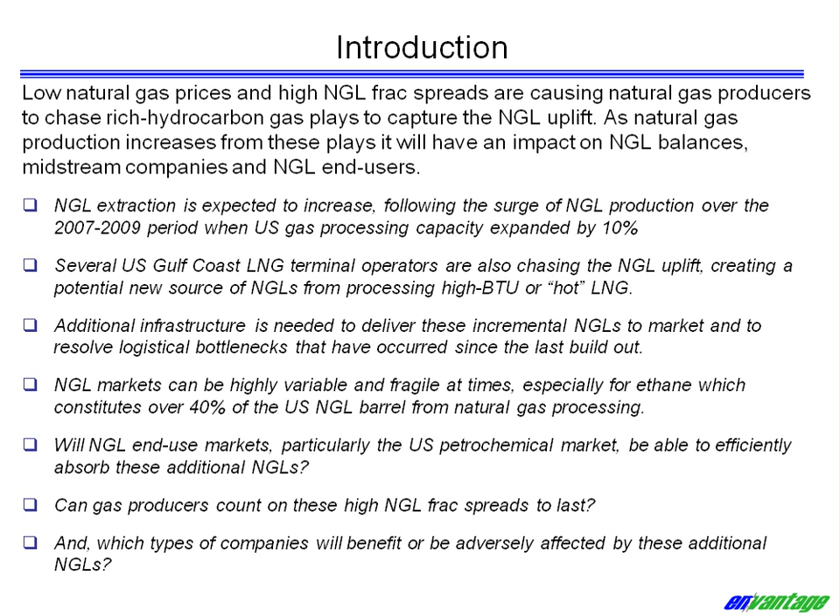When we look at the overview of the business, a couple of things to note about the basic facts of NGLs: natural gas liquids are not a single entity, but consist of 5 distinct components—ethane, propane, normal and isobutane, and natural gasoline. Each NGL has its own set of fundamental drivers and pricing mechanisms, even though NGL components may compete for the same market or come from the same supply source.

There are 2 major supply sources for NGLs: the processing of natural gas to extract a mix of NGLs that must then be fractionated into the individual NGL components, and as a byproduct of crude oil refining, the extraction or fractionation of those gas liquids from refinery off gases generated from various refining processes.

NGLs have little, if any, influence on their markets, and they must compete with alternative feedstocks or fuels. Consequently, each NGL must seek a market or be priced competitively to be fully absorbed by those markets. Any analysis of NGLs as a single entity would be a gross generalization of the fundamentals that drive supply, demand, and pricing of individual NGLs, and could result in misleading conclusions about the outlook of any individual NGL.

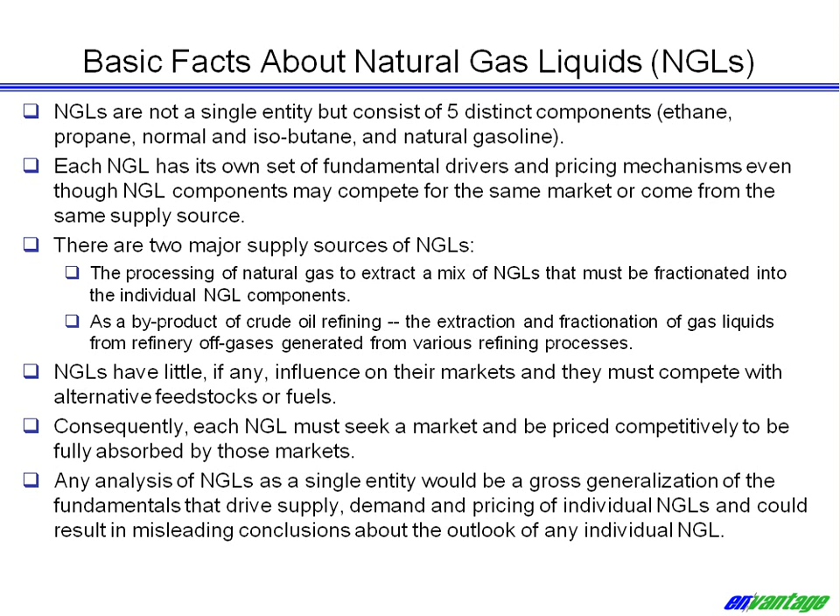So therefore, we really have to look at - I'll introduce some of the concepts for the NGLs as a whole, but we really have to break them apart and look at the individual NGL components. In this presentation, I'm really going to focus on ethane, and I'll explain why the focus will have to be on ethane going forward.

If we look at the major U.S. NGL supply sources and end uses, basically the U.S. NGL market - I just took a 5-year average going from say 2004 through 2009. The 5-year average is about 2.44 million barrels a day. So that's the size of our U.S. NGL market over the past 5 years.

Gas processing has actually contributed about 73% of the total NGL supplied to the market. And when you look at the amount of NGLs that have come from gas processing, almost 40% of those NGLs was ethane, about 29% was propane, about 17% was your butanes, and then natural gasoline was about 15% of that NGL barrel that came from gas processing.

As we noted before, crude oil refining is also a contributor of NGLs. A lot of it is on a seasonal basis, but the crude oil refining contributes about 16% of total U.S. NGL supplies, and most of that NGLs are propanes and mixed butanes that come off the refineries. There's a little bit of ethane that goes into the petrochemical industry.

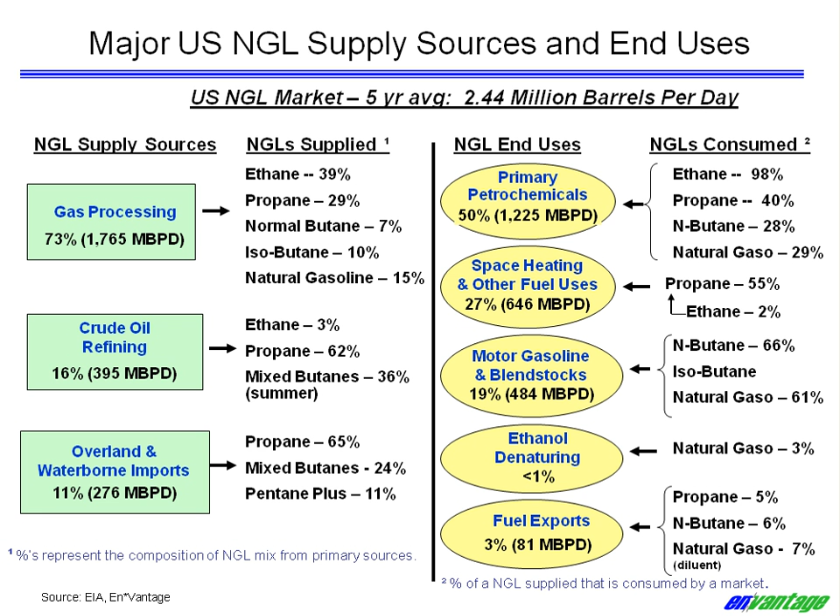So that kind of gives you a really broad overview of the basic supply sources of NGLs and the basic end use. But the key point here is that really gas processing is your major supply source, and your major end use is really your petrochemical manufacturing of ethylene and other olefins, and your major end use and health of the NGL industry is really tied to your primary petrochemical market.

If we try to tabulate and track every major driver for liquids, both on the supply side and the demand side, it would look something like this. I'm not going to go over this slide in a whole lot of detail, but on the supply side, certainly the biggest drivers for the production of liquids from gas processing are associated gas production, that is gas that's associated with oil production, and gas that's non-associated with oil production. There's a certain quality of NGLs in those gas streams. If the gas is rich enough, it has to be processed to meet pipeline quality specs, and that feeds into the NGL supply. Also, you've got refining operations, and everything else that can influence imports and so forth.

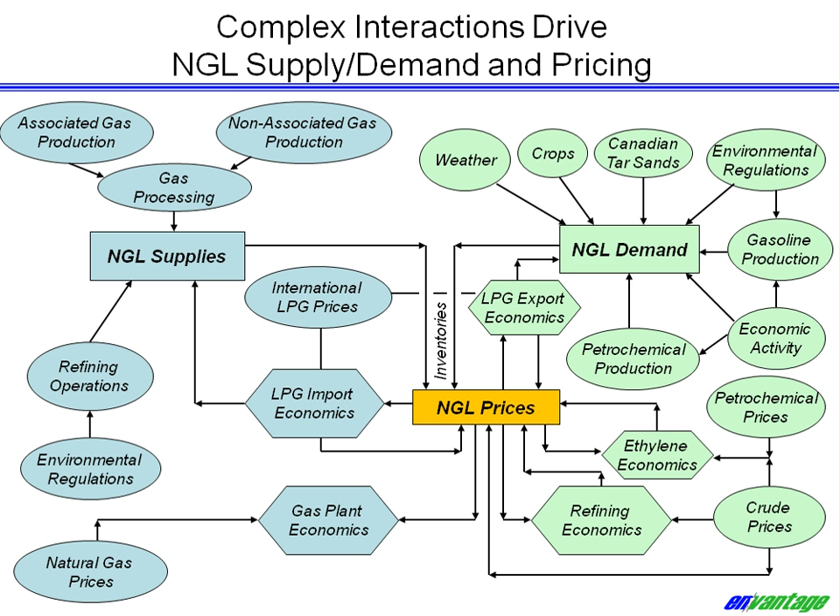Environmental regulations can have a big impact on refining operations and its ability to either produce liquids or in some cases consume liquids on the demand side. On the demand side, there's a whole host of fundamental drivers, everything from weather, environmental regulations, how much gasoline we produce, the economic activity that may drive petrochemical production, things that determine ethylene economics and refining economics all play a role. It's a pretty complex thing you've got to watch all the time. The problem is not all NGLs are influenced by all these factors. Some are influenced by some of these factors, and that's why you have to break up the NGL barrel to really understand which factors influence which NGL.

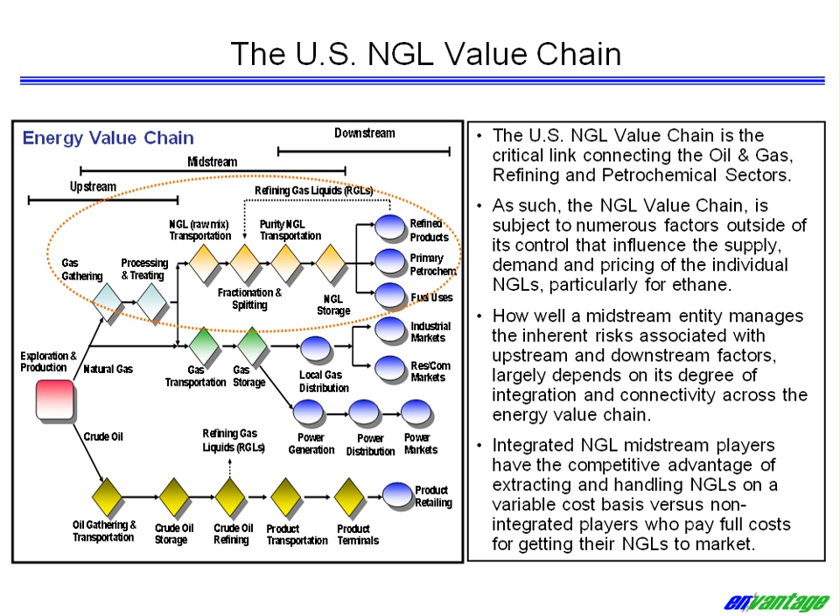If we move on to the next slide, the one thing I want to point out is where the NGL value chain fits in the total energy value chain, and it's really between exploration, production, and end uses. The key thing here, too, is when you look at different companies in the midstream sector, you want to see how integrated they are along this value chain. Usually the integrated midstream players have the competitive advantage of extracting and handling NGLs on a variable cost basis versus the non-integrated players who pay full cost for getting their NGLs to market.

One thing to note, too, is the basic drivers for NGL extraction, whether from gas being processed in a natural gas processing plant or from crude oil—ethane is really the only discretionary component in most cases. That is, you have some discretion to leave the ethane in the natural gas stream or take it out. The heavier NGLs, such as propane, normal butane, isobutane, and natural gasoline, all have to be taken out of the natural gas stream to meet BTU specifications or dew point temperatures required by the pipeline. In crude oil refining, it's basically just a byproduct.

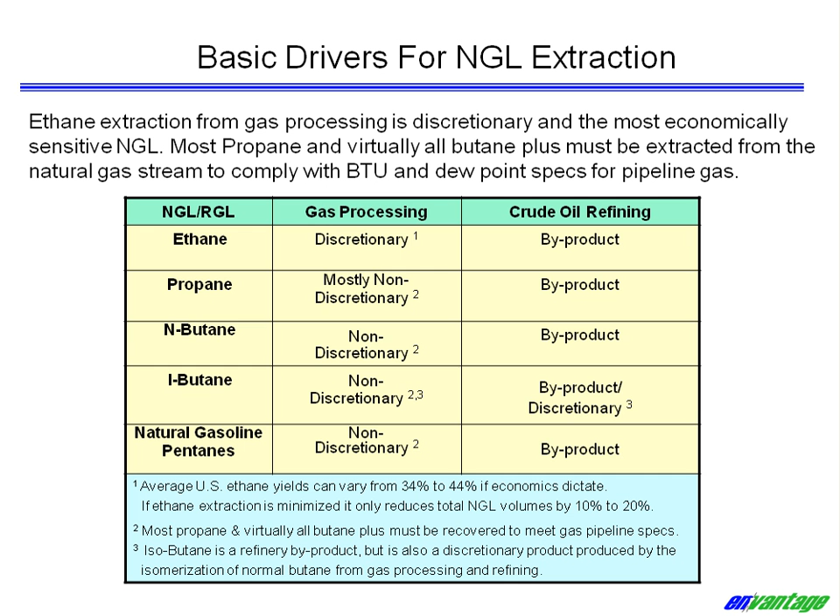Because of the different processes in the refinery, they produce off gases. Those off gases contain NGLs, and then they make a decision whether to extract those NGLs or burn that off gas as fuel. Usually they can't burn it as fuel because there are other impurities in that off gas that create greenhouse gases, so they usually have to extract it and just sell it to whatever the market will bear. So it's basically a byproduct of refining operations, and to some extent you have to take out a lot of the NGLs out of the gas stream to meet pipeline specs, with the exception of ethane.

If we just look at a pattern of supply and demand, this layers on the different primary supply sources for liquids, and you can see there's a very seasonal pattern for the supply of liquids. Usually supplies peak during the summertime when refiners have to take out a lot of the NGLs from their gas liquids, and demand is denoted by the red dotted line. It actually peaks when supply is at a seasonal minimum, so storage is used to balance supply and demand going forward. But as you can see here, the supply of NGLs has been fairly variable over time.

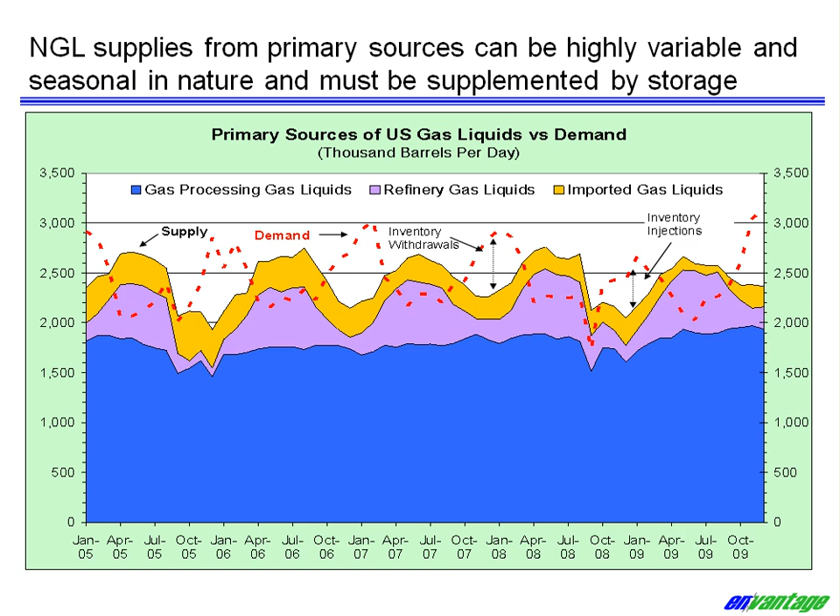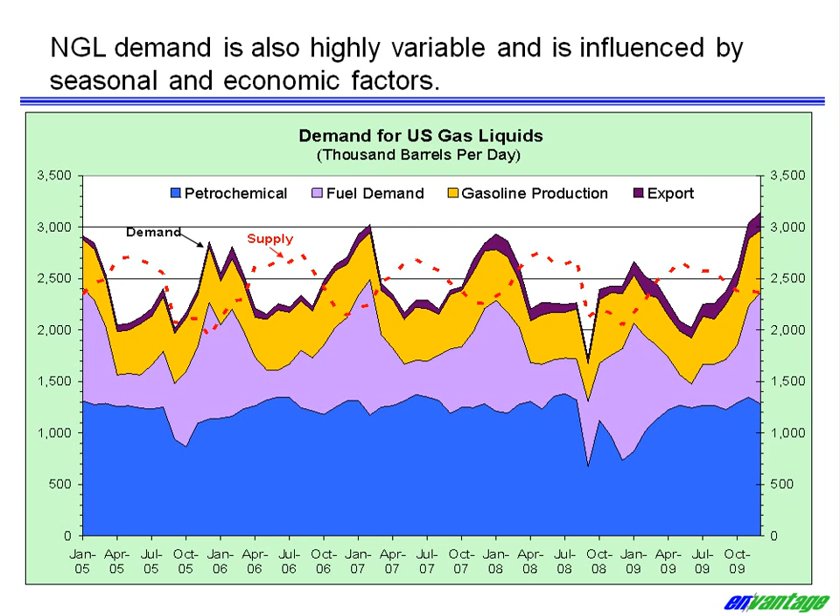Again, supply is counter-seasonal to demand, and this is where inventories come in and out of storage to balance supply and demand. So it's a highly variable type of situation from a standpoint of demand and supply. It's not a steady state. It's highly seasonal in some cases.

The other thing I want to key off this: each NGL has different markets, with the exception of ethane. Ethane's primary market is in the production of ethylene, and so it has to compete with different feedstocks. Some of them are NGLs themselves. Some of them come directly from the refinery, like naphtha and gas oil. If ethane is not priced competitively with these other feedstocks, then it has to stay in the natural gas stream, or a significant part of it has to stay in the gas stream.

And there's a relationship between ethane and crude oil, and it can vary all over the map, but right now ethane is selling at a very low relationship to crude oil. It's been trending down over time, and you'll see that most NGLs have been trending down relative to crude oil.

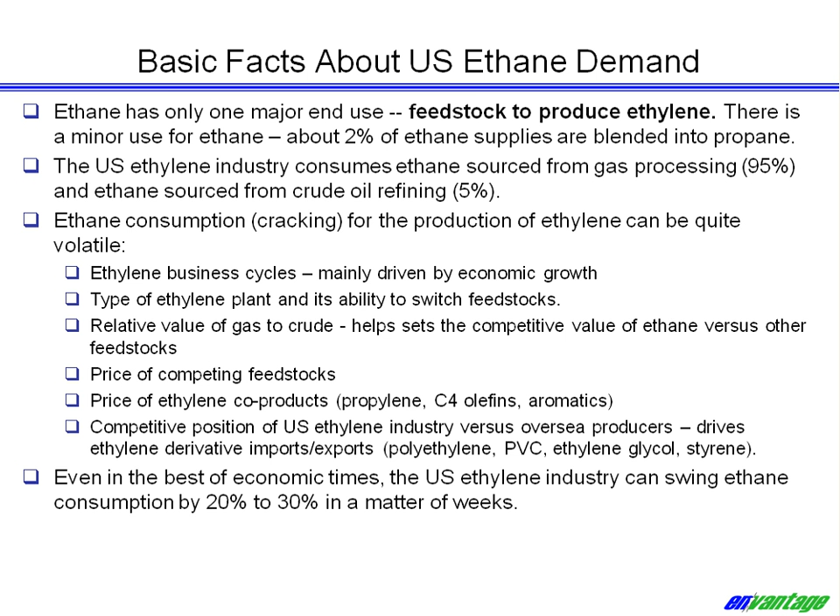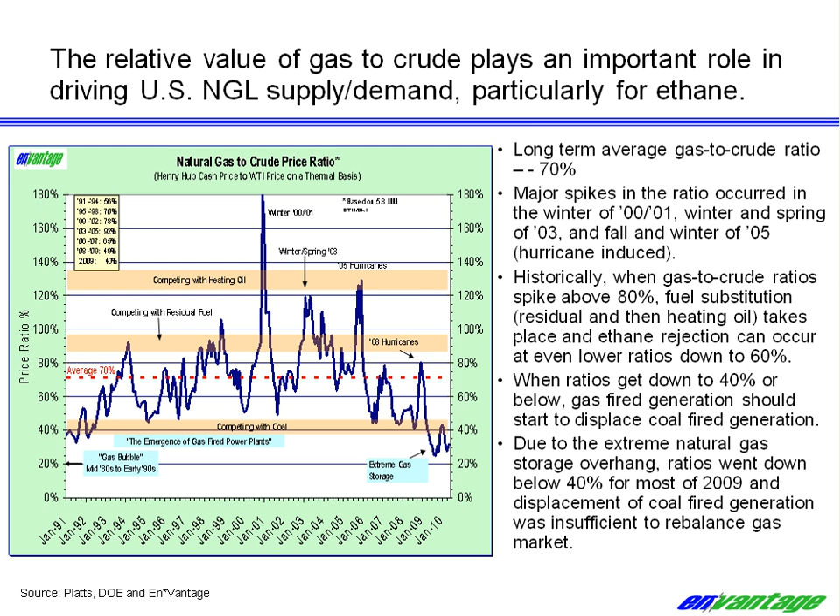The other thing is that what's giving us the large NGL uplift is that we have low gas-to-crude ratios, and we've had relatively high crude prices compared to the past. So the BTU spread between natural gas and crude oil has been quite high. Low gas-to-crude ratios plus high crude prices has created a very wide gas-to-crude spread of around $10 a million BTUs.

This is a huge amount, as you can see over time. That average value has been right around $2 a million BTUs, and we've been trading somewhere between 8 and even as high as $12 a million BTUs, and this is what's giving us our NGL uplift.

This is actually shown in the next chart. Because NGLs sell at a relative value against crude oil, and the basic price floor for NGLs is natural gas, we get this really wide NGL uplift.

What we've done here is taken a typical NGL barrel from a new processing plant, which extracts at least 50% of its NGL as ethane, and you can see the very wide margins that we have seen.

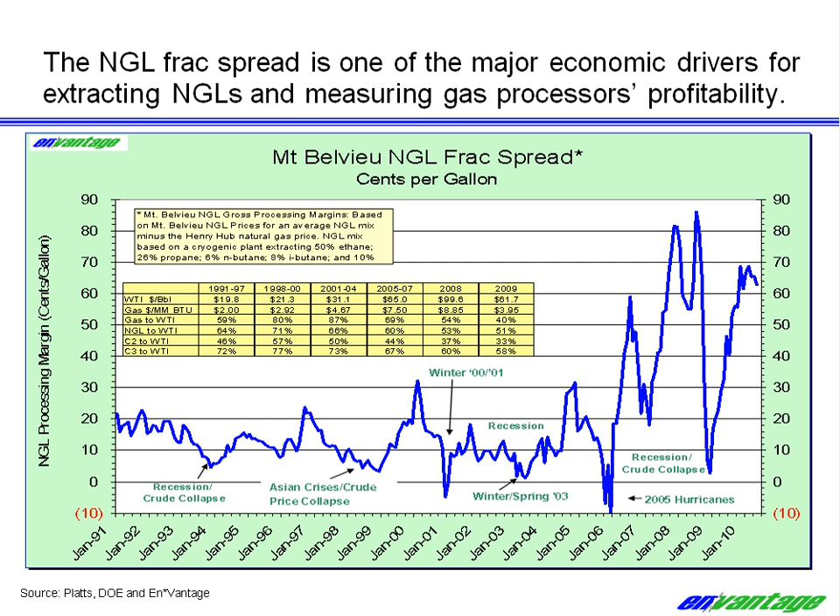This is why a lot of producers want to go after the rich gas plays, because if they do, they get an uplift to the value of their natural gas by extracting the much higher valued liquids in that gas stream. So we've had a very high NGL uplift over the last couple of years due to the very low gas-to-crude ratios.

Basically, as more ethane is brought to market, its value relative to crude goes down. Also, the petrochemical industry has quite a bit more flexibility than it's had in the past to swing off and on ethane. So if ethane gets too pricey, petrochemicals swing off and that brings the value down. The combination of more ethane supplies and the flexibility of the ethylene industry has pushed ethane's price down relative to crude.

One thing to note, as a bit of a side note, is that when you see ethane extraction numbers from the government, the EIA, they're really tabulated at the tailgate of a processing plant.

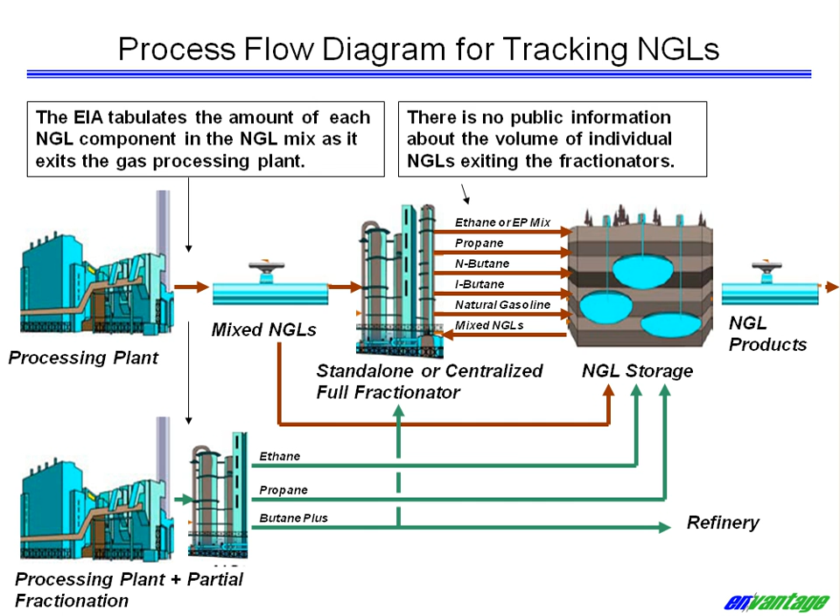There is no public information about the volume of individual NGLs exiting the fractionators. All that information resides at the tailgate of the plant. In some cases, the processing plant will have fractionation associated with it, or partial fractionation. But in most cases, what you see is a processing plant, like it may be up in the Rockies, and it sends its liquids down very long NGL pipelines that may be owned by Enterprise Products or ONEOK or whoever, and then it goes to a centralized fractionator.

If we had to broadly draw on a map where the flow of NGLs is, what you have is most of your processing industry located in processing regions where the gas production is. So you have major processing regions like the Rocky Mountain area, the San Juan Basin, or the Permian Basin in eastern New Mexico and West Texas. South Texas is a major processing region. All along the Gulf Coast, especially the Louisiana Gulf Coast, which takes a lot of offshore gas, that's another processing region. Then you have your mid-continent region, with the Anadarko Basin being another big processing region. And also there's a big processing region in western Canada.

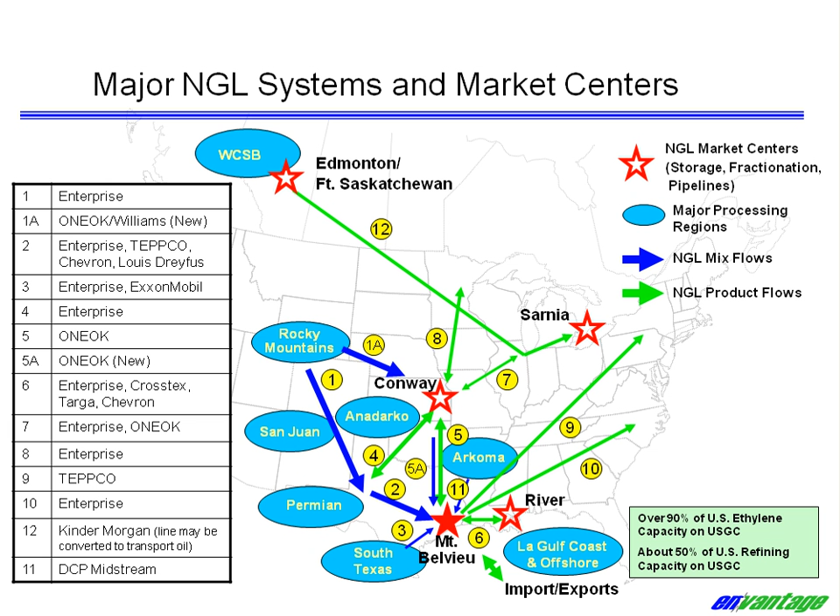So that basically gives you a picture of the major flow patterns for NGLs, and also who owns those big NGL corridors or pipelines to the marketplace.

One of the things too is that when we've referenced NGL frac spreads on the Gulf Coast, we've done so by taking Mount Belvieu prices less Henry Hub prices for natural gas. But in actuality, you've got to subtract transportation and fractionation costs to come up with what the regional NGL netback value is at the plant. That is, you take your Mount Belvieu price for your individual NGL, and you figure it costs so much to transport this NGL to Mount Belvieu, and so much to fractionate, and that's how you come up with your regional NGL netback value. Then you take the value of natural gas at the point where the processing plant is located, and that gives you your shrinkage value, or the cost of taking the NGLs out of the natural gas stream, and that's how you come up with your regional NGL frac spread.

So realize that the NGL frac spreads I've been quoting are based on a Mount Belvieu basis, but to net it back into a particular region, you have to subtract out transportation and fractionation costs, and also take into account the value of natural gas at that particular site.

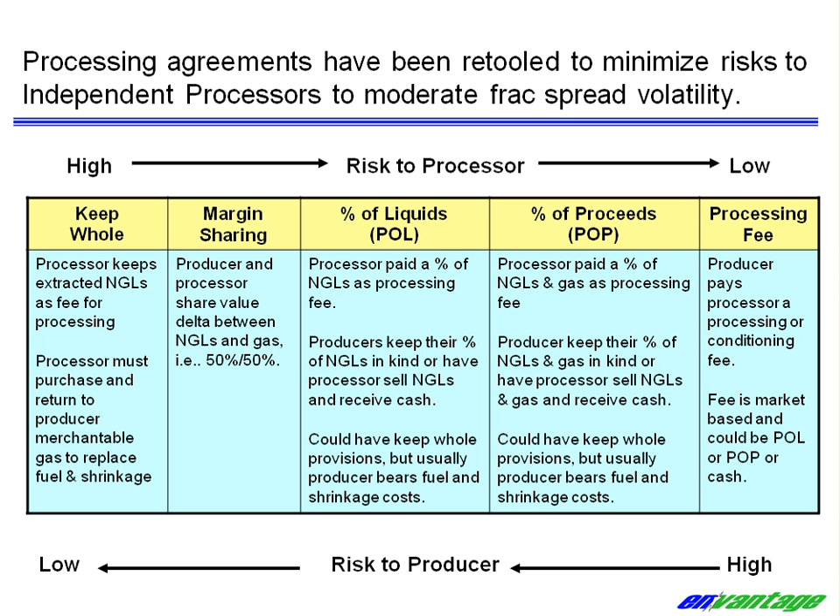In some cases, there are processing fees built into these processing contracts. That is, if the value of liquids gets so low relative to the value of natural gas, the processor can charge the producer a fee for basically conditioning his gas. So you have to be aware of different types of processing contracts that are out there in the marketplace.

The other thing to realize when you look at different companies that operate along the NGL value chain is that the gathering and processing of gas can really float. There could be a lot of commodity price risk depending upon the type of gathering or processing contracts they have. That is, if they're on a percent of proceeds basis, then they're really floating with the commodity price.

But as you get downstream from the processing plant into NGL transportation, fractionation, or NGL storage, it's really a fee-based type of revenue stream. There's very little commodity price risk involved, though indirectly there is, because if it becomes uneconomical for a processor to extract ethane, then those that own the transport, fractionation, or storage are subject to volume risk. And there's certainly counterparty risk in that.

So a lot of people think that downstream, in the NGL transportation, fractionation, and storage part of the value chain, there's very little risk, but there is quite a bit of risk - volume risk - especially if there's gas decline behind the processing plant, or it becomes uneconomical to extract the ethane. You could see maybe 50% or more of your NGL volume go down, so those that own that part of the value chain have quite a bit of risk.

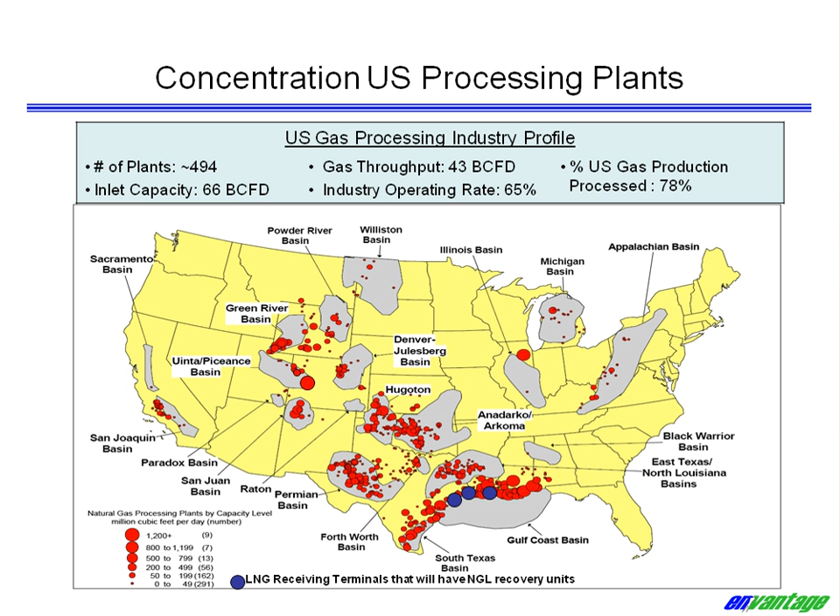So that's a new form of receiving NGLs via rich or hot LNG.

If we look at what's been going on, we've had major reserve additions in the big shale basins. We're getting big reserve additions in the Texas inland areas like the Barnett Shale. We've got Wyoming—it's not such a shale play, but we're finding more reserves of natural gas there—and in Colorado, and certainly in Oklahoma, like the Woodford Shales.

What's not shown here is probably the Marcellus in the Appalachian area. It is shown here, but it's going to grow much more than what's shown. The government hasn't updated its data since 2008. Also, South Texas is really going to be a growth area because of the Eagle Ford Shale.

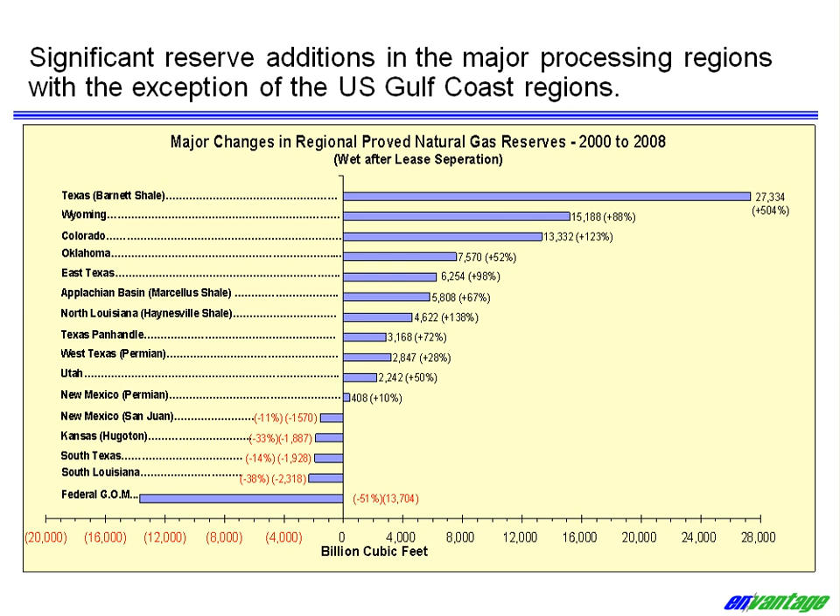Because of all these big reserve additions, we've seen a lot of drilling that has occurred. This chart shows that we've had a big surge in gas production since 2006. We also overlaid rig count, read on the right-hand axis, and we saw rig count really surge as these new gas plays got developed.

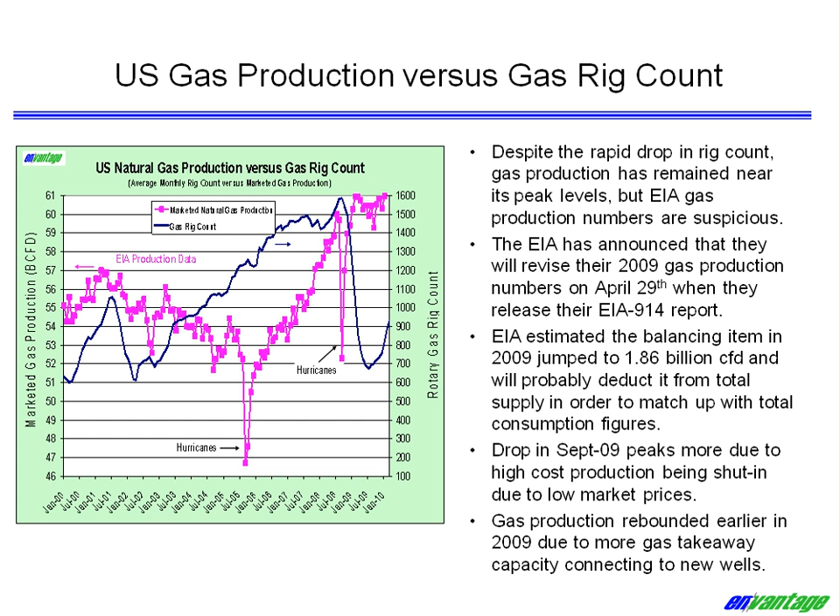Right now we're producing somewhere between about 59 and 60 BCF a day of gas production. Even though drilling has come down quite dramatically, we're still seeing fairly good gas production. We might see a little bit of a decline, but not much. It takes about 1,000 gas rigs in general to keep gas production from declining. We're right around 950 gas rigs, so we're basically holding our own, and that's expected to continue, maybe a slight decline over time, but nothing major.

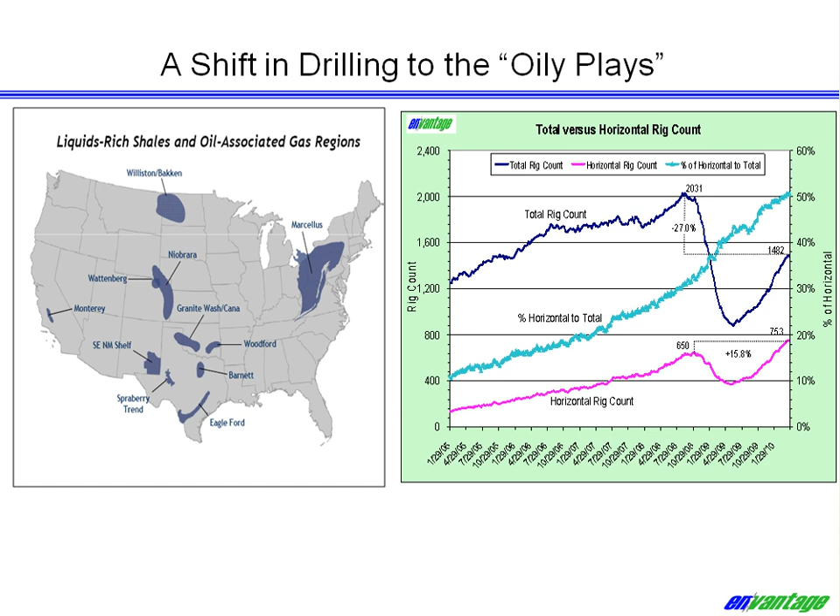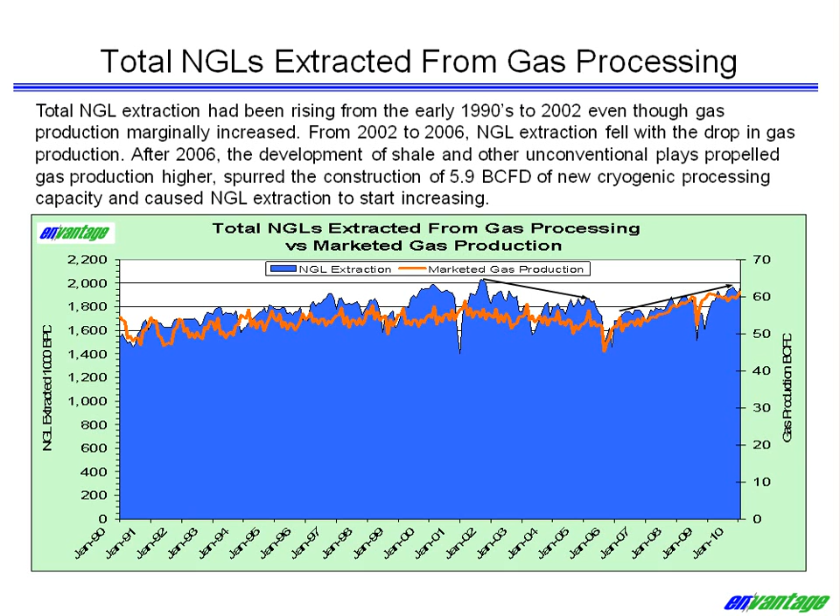If we look at total NGL production over time, overlaid with natural gas production, you can see that from the early 2000s to 2006, our NGL production was trending down. Then as all this new gas started to be developed, we added a lot more processing plants—about 5.9 BCF a day of new processing capacity, basically expanding the processing industry by about 10%. We saw that NGL production started to really pick up from 2006 to the present.

One is that we added a lot of new cryogenic-type processing plants that have deep ethane extraction capability. The majority of processing plants in the industry for the past 20 or 30 years have been cryogenic, but they've only been able to get maybe anywhere between 50 to 70% of the ethane out of the gas stream. Now these newer cryogenic plants are able to get as much as 90% of the ethane out of the gas stream. So that's one reason why we've seen ethane extraction pick up.

The other reason we're seeing the heavier components not increase in total volume is that the gas is actually getting a little bit leaner. That is, there's less liquids in the gas stream, and there's still ethane contained in that gas, and we're doing a great job extracting it, but we're basically extracting all the propane, the butanes, and natural gasolines that we can.

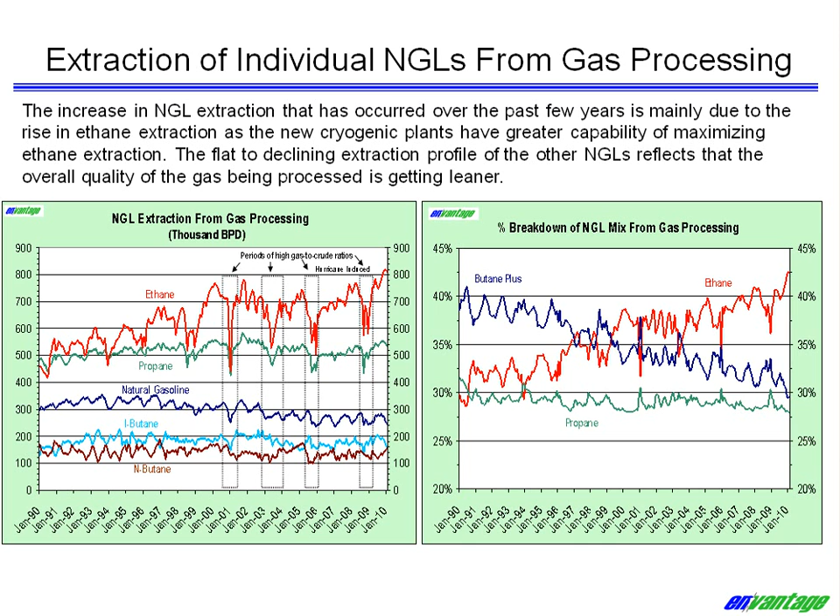And that's why we really try to focus on ethane, because of its usage - it can be kept in the gas stream, or not - and also because of its usage in the petrochemical industry, they can use it or not to a great extent. So you really want to focus on that part of the NGL barrel because it has the most economic sensitivity of all the NGLs.

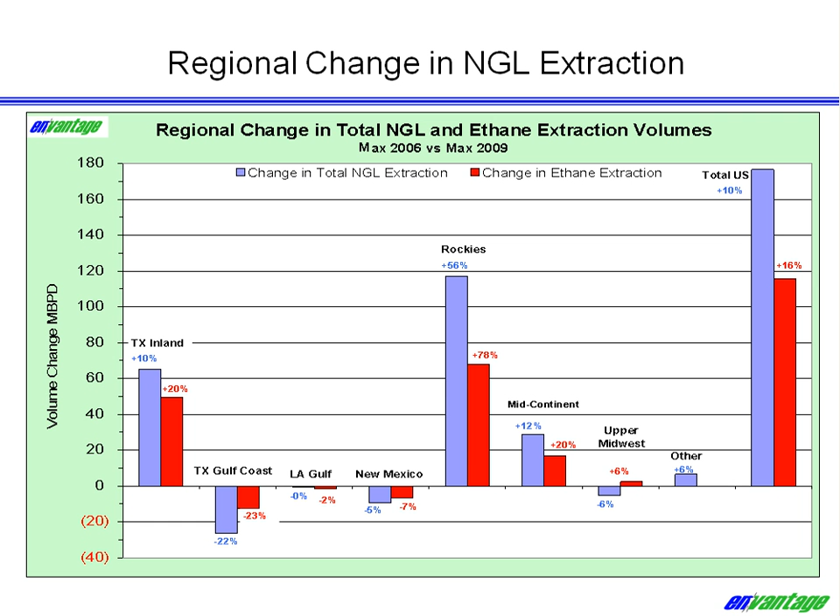So we're seeing a regional shift in NGL extraction, and that's caused us to build more infrastructure to bring those liquids down to the market centers. That's why you've seen a lot of activity by Enterprise and ONEOK in building new pipelines, new fractionators, and so forth, because they're trying to adjust to this regional shift in NGL extraction.

Over the next 2 years, even though we've built a lot of new plants, we see another 1.3 BCF of new processing capacity being built, with the capability of putting another 100,000 barrels a day of NGLs onto the market, of which 44,000 barrels a day will be ethane. Now, this is if they were operating at 100%. In our forecast, we put some variables to this to say these plants aren't going to operate at 100% - they're going to wedge up over time. But anyway, that's what they're capable of doing if operating at 100%.

The Eagle Ford Shale in South Texas has the potential to be a major NGL producer from the rich gas plays in those shales. That gas is extremely rich - it has about 9 gallons per 1,000 cubic feet of gas. Some of those liquids have to be taken out right at the field before they even reach the processing plant. But we think the amount of gas that could be produced there is about 3 to 3.5 billion cubic feet a day, and about two-thirds of that gas will be rich, we think.

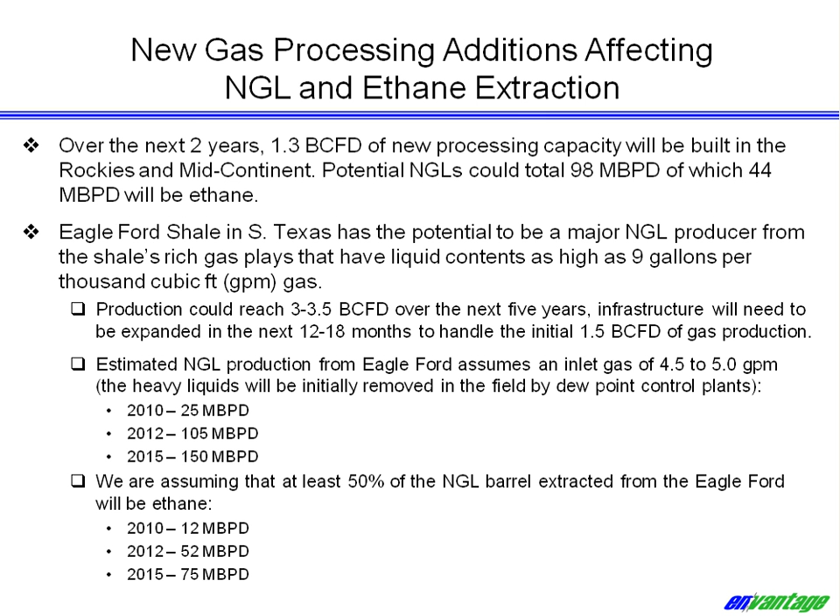Over the next 12 to 18 months, more infrastructure is going to be needed to handle the first initial surge of this gas stream, which we are predicting to be about 1.5 BCF a day over that period. The estimated liquids from the Eagle Ford Shale - we're assuming about 4.5 to 5 gallons per 1,000 cubic feet will be in this gas stream when it reaches the plants. And we could see by 2015, 150,000 barrels a day of more NGLs, of which about 75,000 barrels a day will be ethane.

We're also thinking that LNG terminals could be a major source of NGLs over time, but basically the rateability is very, very questionable from these LNG terminals. We've got about 1 BCF a day of NGL recovery from these terminals, at the Trunkline terminal. The uplift is about $1.50 today, so there's a lot of incentive to try to take these liquids. A lot of these liquids - primarily about two-thirds - is ethane that's contained in this LNG stream.

By 2012, Freeport LNG is expected to have about 800 - they're going to start out with 2 trains of 400 million a day each of processing capability, and then later on, Cheniere is going to add about a B.

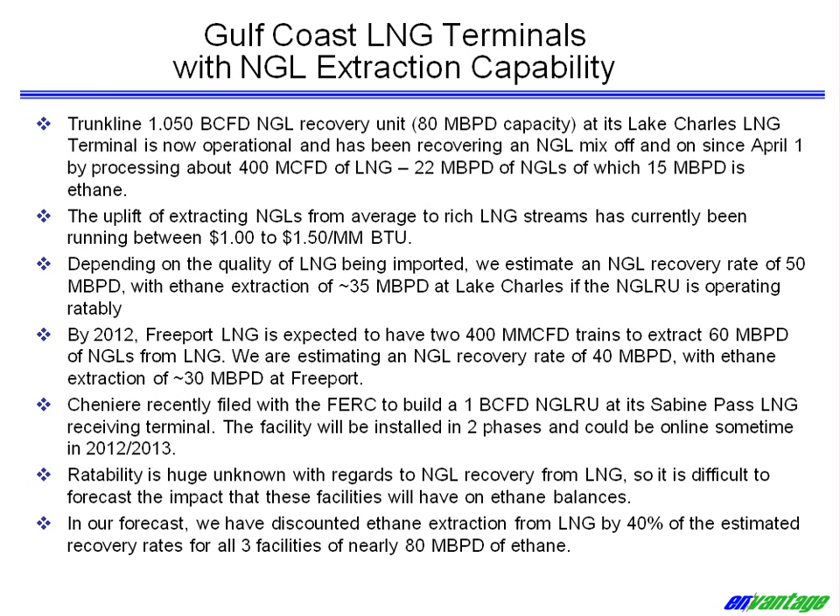Rateability is a very big question mark here. We don't know how often they're going to bring LNG in to extract, so there's a big question mark in terms of whether we're going to see the full potential from these terminals as they are designed to do.

If we look at this from a total amount of liquids, there's one chart devoted to total liquid extraction, and one chart devoted just to breaking out the ethane portion. As we can see, the plants that existed before 2007 are noted in the blue shaded part of the bar chart.

Those plants will continue to see decline in liquid extraction from their legacy gas, but over time, as new plants recently built over the last 2 or 3 years, and those that have been announced to be built, shaded in green, come online, and you add on what could come from the Eagle Ford Shale and what possibly could come from LNG, we could see, in the case of ethane extraction, it should really start to ramp up and hit well over 900,000 barrels a day. About over 2 million barrels a day is going to come from total NGLs. We have built in decline rates into this, but we're going to get a lot more liquids, principally ethane, onto the market in the next 2 to 5 years.

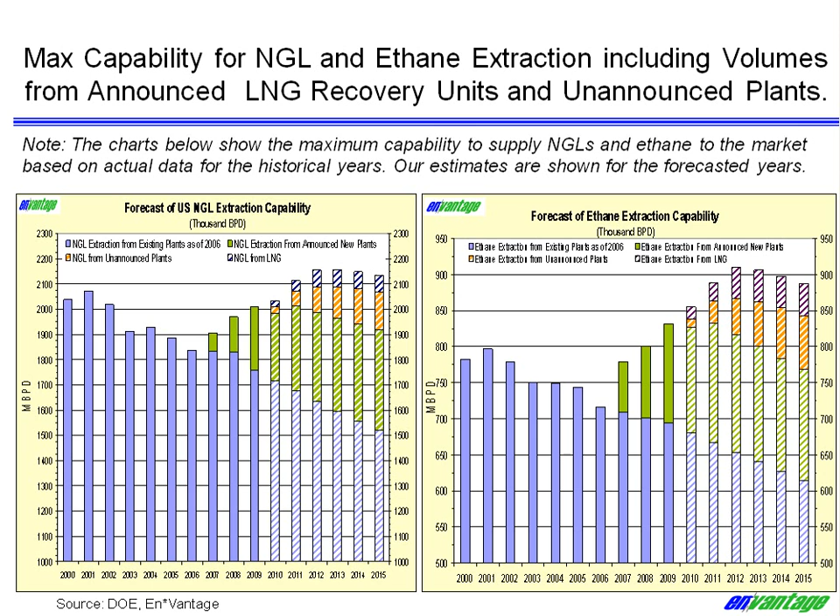Another wild card is how much we're going to get from the Marcellus Shale. There's about 1.2 BCF a day in new processing capacity that's been announced to be built. Right now we're estimating about 57,000 barrels a day will be propane plus that will be extracted from these plants. At this time, no ethane will be recovered. However, initially they could recover 42,000 barrels a day of ethane if they had a market.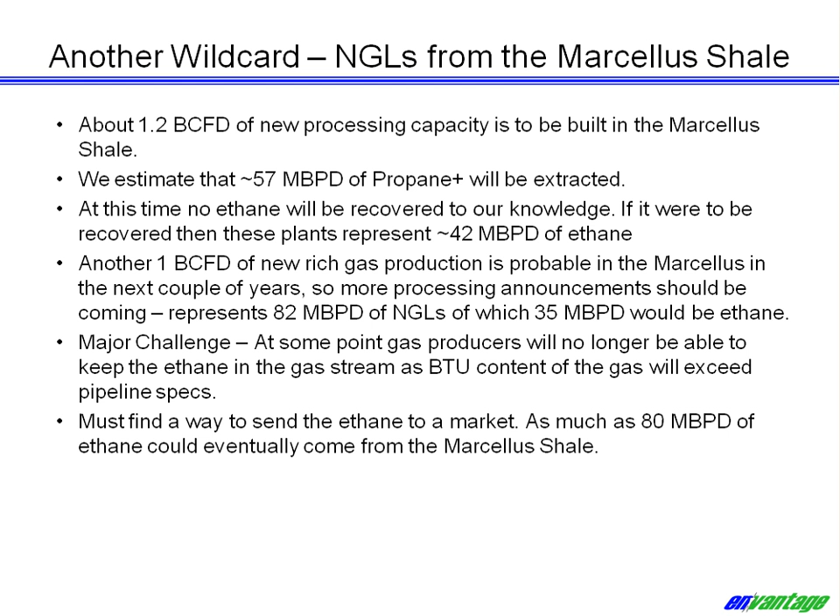But right now they're going to be blending that ethane into the gas stream. Another BCF a day of new rich gas production is probable in the Marcellus play, representing about 82,000 barrels a day of liquids, of which about 35,000 barrels a day could be ethane. The major challenge is that at some point the gas producer will no longer be able to keep the ethane in the gas stream, as the BTU content will exceed pipeline specs in the Northeast, so they must find a way to extract that ethane. We think as much as 80,000 barrels a day of ethane could eventually come from the Marcellus play.

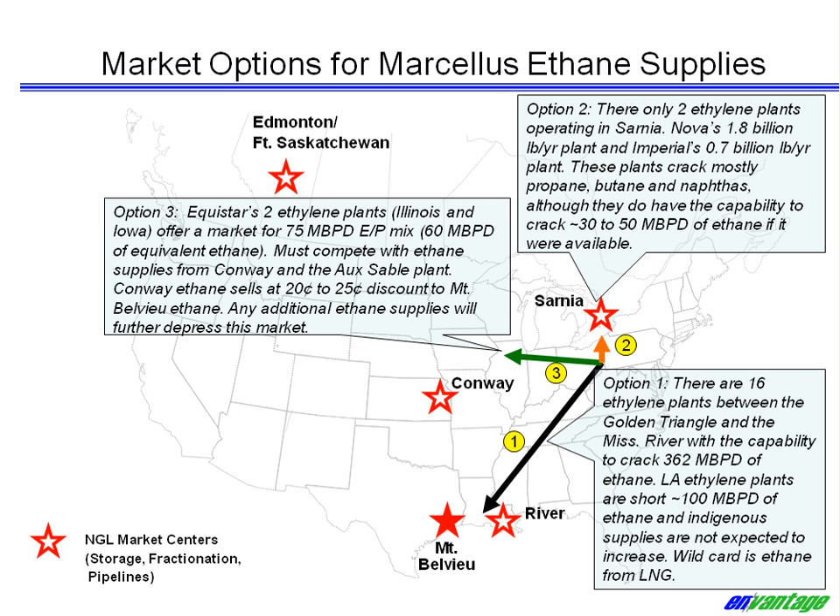Some projects have been announced - one going into Sarnia, and several announced to go in the Midwest. We think the best option for these liquids is to come to the Gulf Coast - that's where the biggest market is, specifically for ethane. We think going into Sarnia and the Mid-Continent is a real mistake by some of the folks who proposed these projects. We think they'll get very low netbacks for the producers, and those markets are not large enough to absorb the amount of ethane that could come out of the Marcellus play.

Let me just quickly go over the NGL demand by the petrochemical industry.

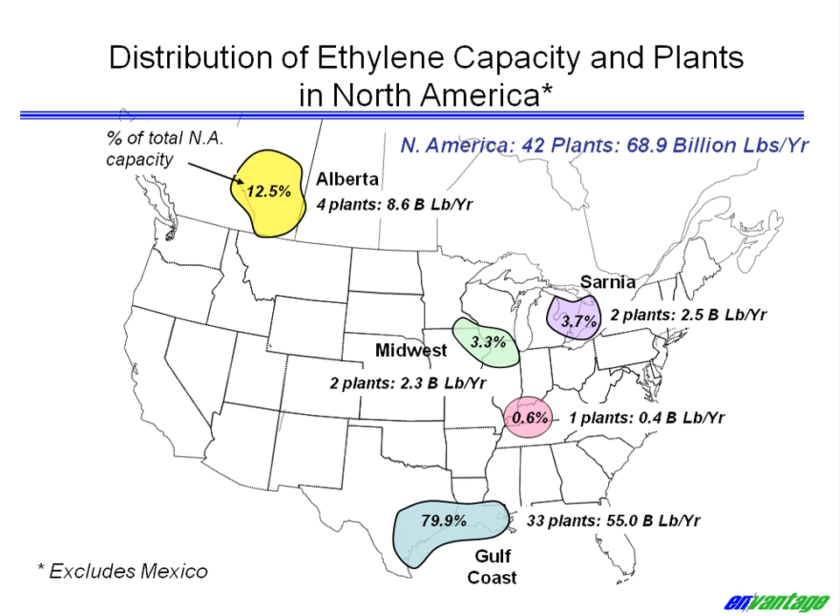The next slide, titled Distribution of Ethylene Capacity and Plants, shows the distribution of ethylene plants across North America. Nearly 80% of U.S. ethylene capacity is located on the Gulf Coast between Corpus Christi, Texas, and New Orleans, Louisiana. The next highest concentration of ethylene plants is in Alberta, then a small amount in Sarnia, a small amount in the Midwest, and one plant in Kentucky. That gives you a broad overview of what the footprint of the North American ethylene industry looks like. This is just the listing of all the plants in North America.

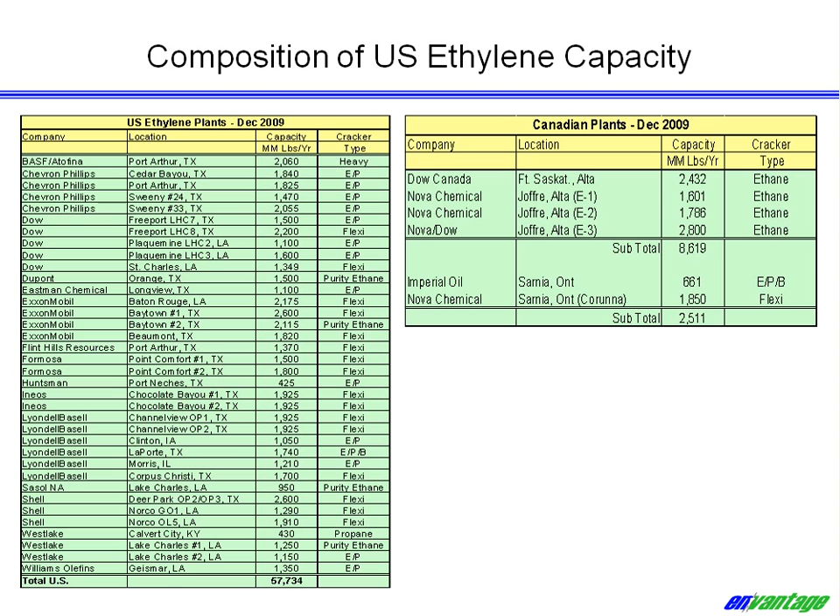Not going to go over that, but in Canada they mostly crack ethane up there, while in the U.S. they crack a variety of feedstocks - not just ethane, but a whole range - and there are different plants that can crack different types of feedstocks. If we go on to the composition of U.S. ethylene capacity, this is what it looks like. Over time, the U.S. ethylene industry started getting away from cracking the lighter feedstocks in the mid-2000s because they thought gas was going to be very, very tight.

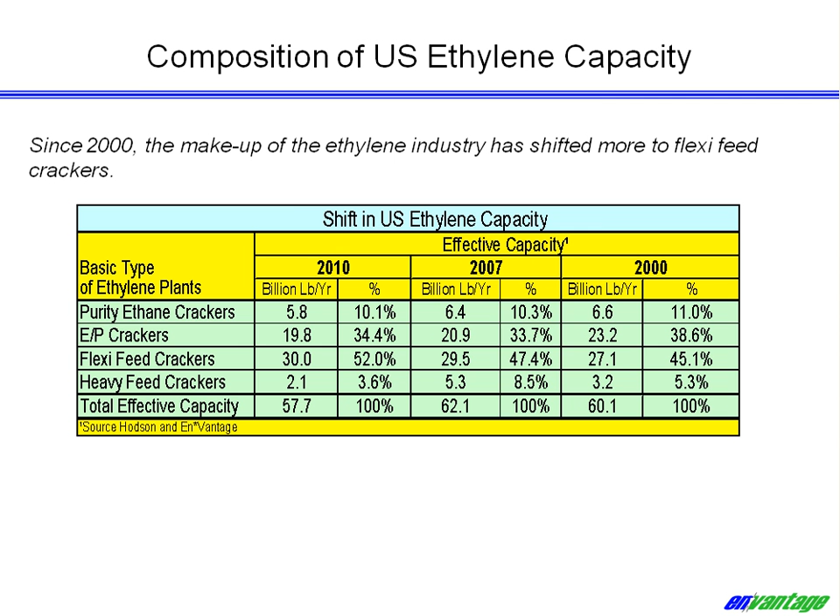What happened is last year, and in 2009, when gas ratios came in very low relative to crude, producers started to shift more of their cracking towards lighter feedstocks, shifting a lot of their flexi-crackers over to crack more ethane. So the ethylene industry has not been a really good judge of the natural gas picture over the last 20 or 30 years. They've usually leaned one way when they should have leaned the other, guessing the gas picture wrong several times.

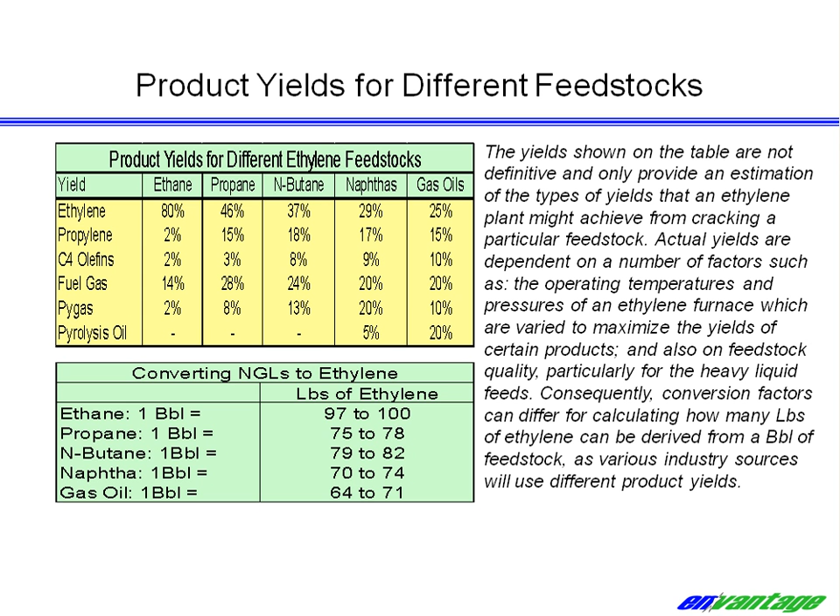I'm going to skip this next slide, but basically it says that if you crack ethane in an ethylene plant, 80% of it goes into ethylene. The heavier the feedstocks, the less ethylene you get, but the more co-products you get. The profile of the U.S. ethylene industry is like this, but anyway, we're cracking a whole lot more ethane, at the detriment of cracking the heavier feedstocks. I'll leave it at that, and then we can go to client questions.

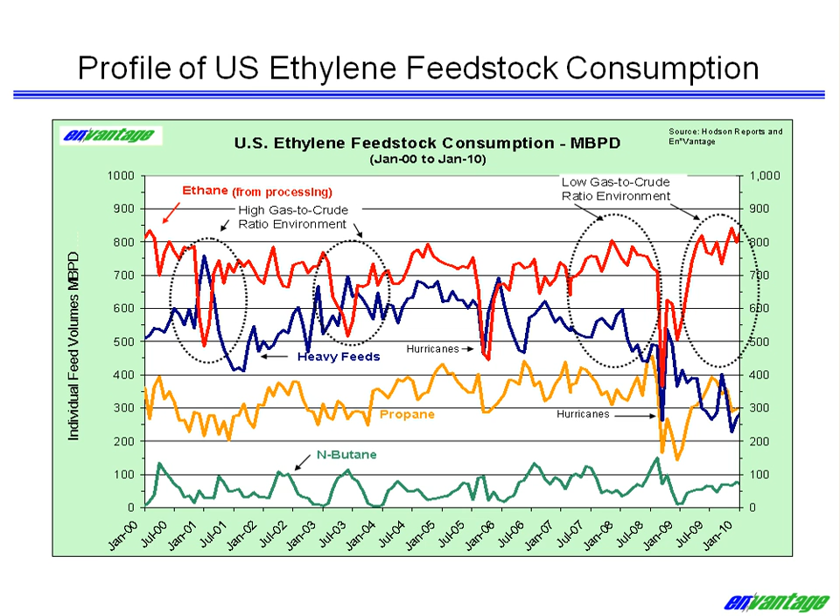For which industry—ethylene or gas processing? Let's go for both since the client didn't specify. For the gas processing industry, it's been around 60 to 70% over the long run; some of the newer plants being built are running much higher. For the ethylene industry, it's been somewhere in the neighborhood of about 90% over the long run.